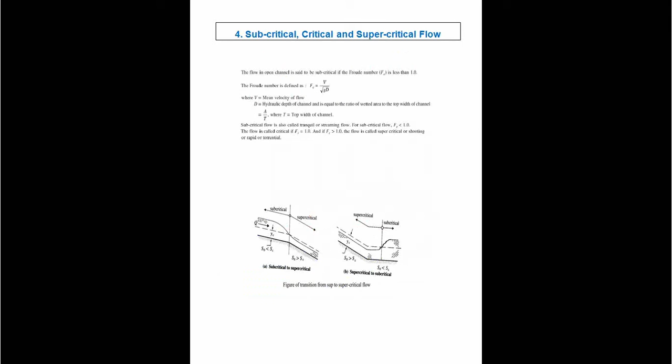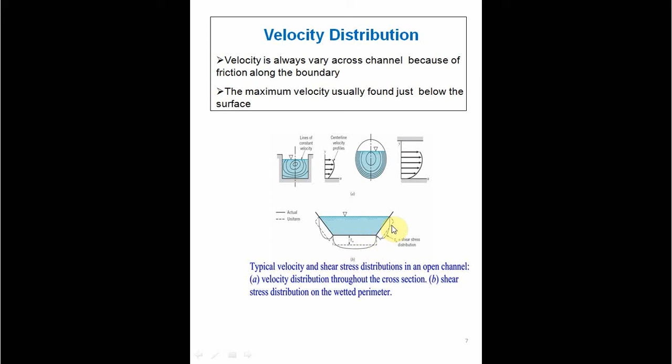And figure B, shear stress distribution on the wetted perimeter. So here, this is the trapezoidal shape, and up to this level the water is stored. So this incline, this incline and this horizontal portion will be the wetted perimeter. This bold line indicates the actual distribution, and the dotted line indicates the uniform distribution of the stresses.

Now coming to Chezy's formula, that is V is equal to C into root of mi, where m equals W upon P, that is A upon P, into sin i. I will call this equation 1. m is the hydraulic mean depth, or R, the hydraulic radius, and C is Chezy's constant. So this is equation number 2. Substituting, V equals C into root of m sin i. For smaller values of i, sin i equals tan i, that is equal to i. Therefore V equals C into root of mi.

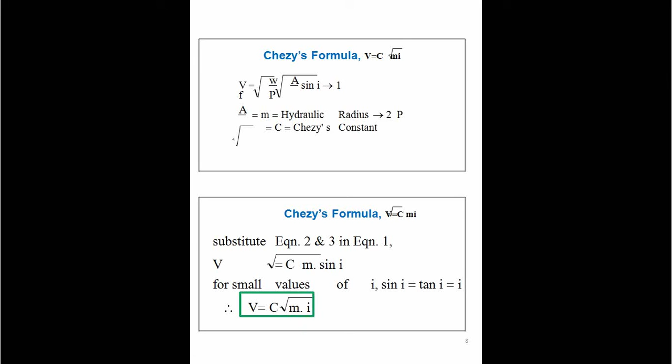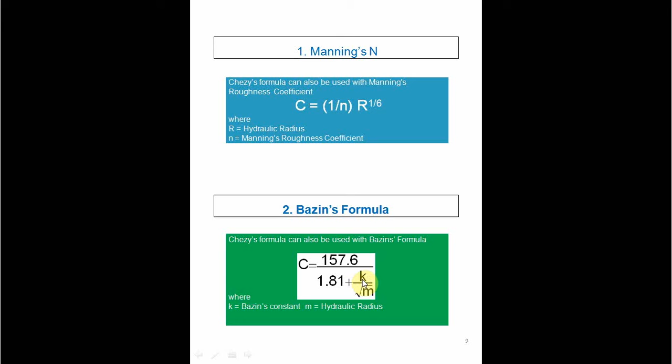Then Manning's n. This is Manning's formula. Chezy's formula can also be used with Manning's roughness coefficient, where C is 1 upon n into R raised to 1 upon 6, where R is the hydraulic radius and n is Manning's roughness coefficient. It can also be related to Bazin's formula, where C is equal to 157.6 divided by 1.81 plus k divided by root of m, where k is Bazin's constant and m is the hydraulic radius.

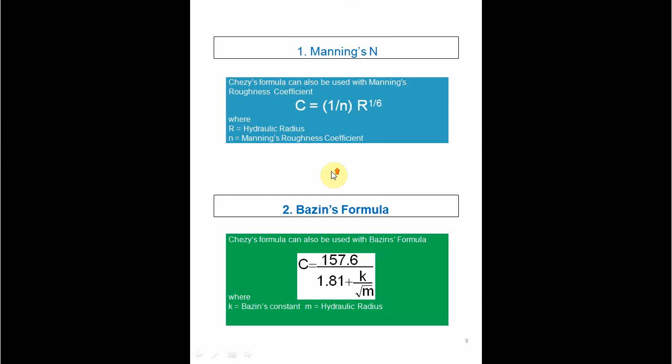Then most economical sections or most economical channels. The condition for the most economical section is that for a given area the perimeter should be minimum. Considering rectangular, trapezoidal and circular sections, these are the three most economical sections. If a section is economical, the cost of construction should be minimum and discharge should be maximum. Types of channels based on shape: rectangular, trapezoidal and circular.

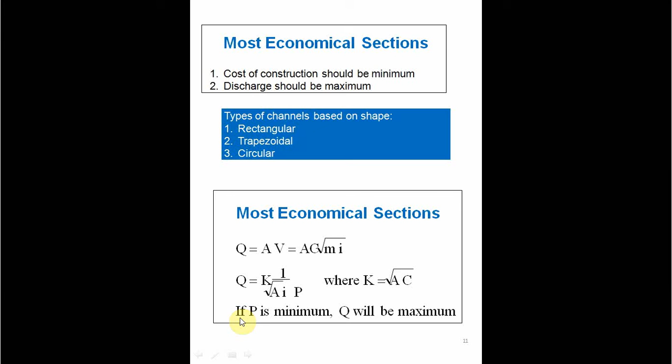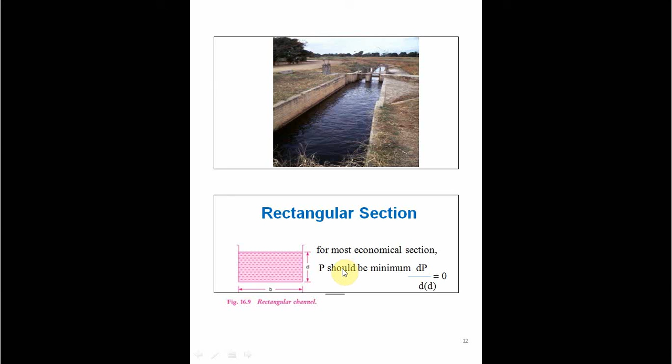Therefore, area equals breadth into depth. Therefore, B equals A divided by D. Therefore, perimeter P is equal to B plus 2 times the depth. So, A upon D plus 2D, that is equation 2. For the most economical section, P should be minimum. That is, the wetted perimeter should be minimum. So, dP/dD is equal to 0. So, therefore, B equals twice the depth, or D equals B by 2.

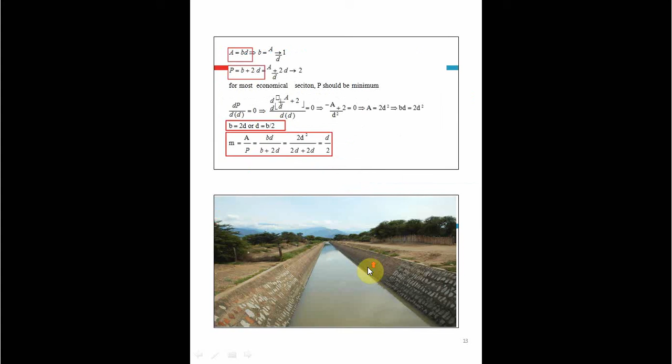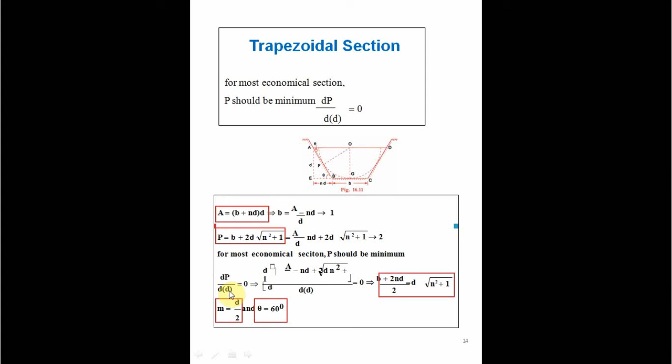For the most economical section, P should be minimum. So therefore, dP/dD equals 0. So therefore, M is equal to D by 2 and theta is equal to 60 degrees. Okay. So this is for the circular sections. Here this is the circular section. This is the centre point, this is the chord, and this is the radius r.

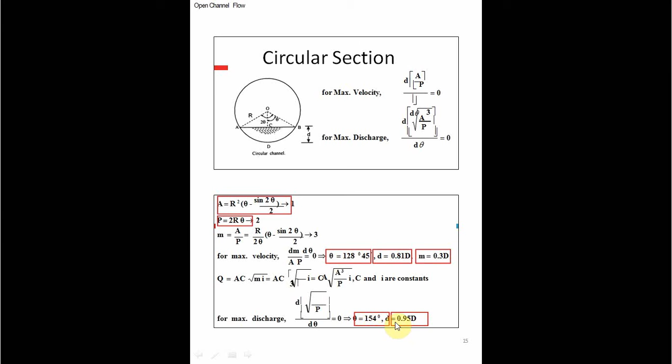We know that Q is equal to A into C into root of MI. Therefore, Q equals A into C into root of A upon P into I, where C and I are constants. So for maximum discharge, that derivative equals 0, theta is equal to 154 degrees, and d equals 0.95 times D. Okay. So, a simple problem.

A trapezoidal channel has a side slope of 1 horizontal to 2 vertical, and the slope of the bed is 1 in 1500. The area of the section is 40 square meters. Find the dimensions of the section if it is most economical. Determine the discharge of the most economical section if C is equal to 50. Slope n is equal to horizontal divided by vertical, that is 1 upon 2. The bed slope given is I equals 1 in 1500, 1 divided by 1500.

From this figure, this is the depth and this is the breadth, and for this inclined portion the width is half of d. So the area of the section A is given as 40 square meters. The Chezy constant is equal to 50, given. So for the most economical section, using equations

16.11 from the previous: (b plus 2nd) upon 2 is equal to d into root of n square plus 1, or b plus 2 into half d, divided by 2, equals d into root of half square plus 1, or b plus d by 2 equals d into root of 1/4 plus 1, that is equal to 1.118 times d. Therefore, b equals 2 times 1.118 into d minus d, that is equal to 1.236 times d. Equation 1.

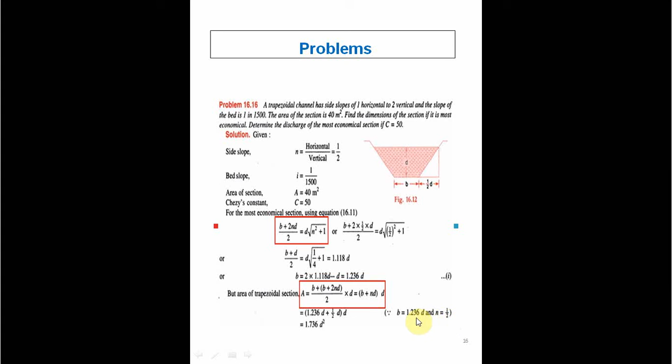But the area of the trapezoidal section A is equal to (b plus b plus 2nd) divided by 2 into d, that is (b plus nd) into d, with b equal to 1.236 d and n equal to 1 by 2. Putting these values, we get 1.736 d square. But we know the area is given as 40 square meters. Therefore 40 equals 1.736 d square, and d equals root of 40 divided by 1.736, that is 4.80 meters. Substituting the value of d in equation 1, we get b equals 1.236 into 4.80, 5.93 meters.

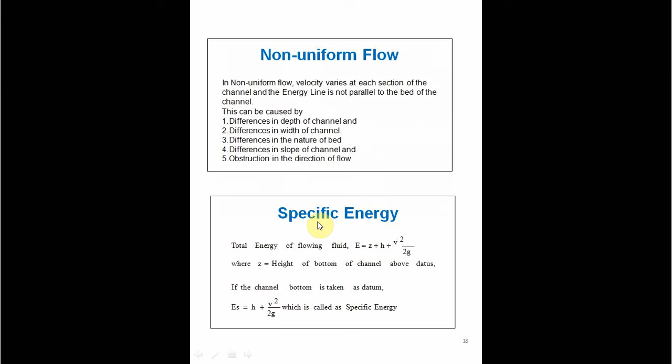Okay. Therefore, the hydraulic mean depth for the most economical section is M equal to d by 2, that is 4.80 divided by 2, that is 2.40 meters. Therefore, discharge Q equals A into C into root of MI. A is 40, C is constant 50, root of 2.40 into 1 divided by 1500, that is equal to 80 cubic meters per second.